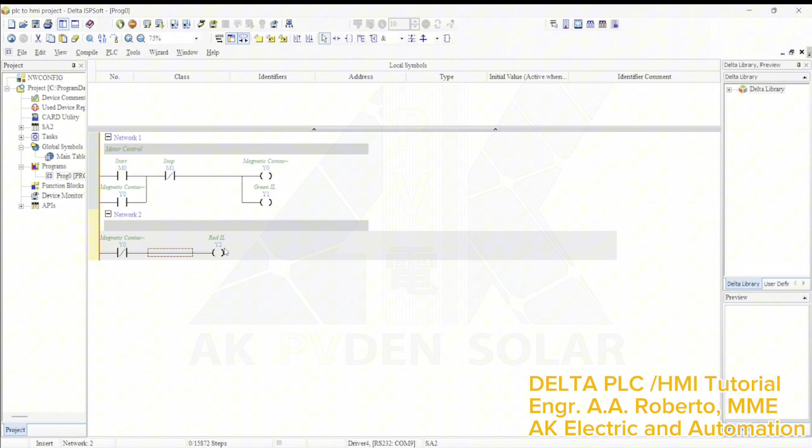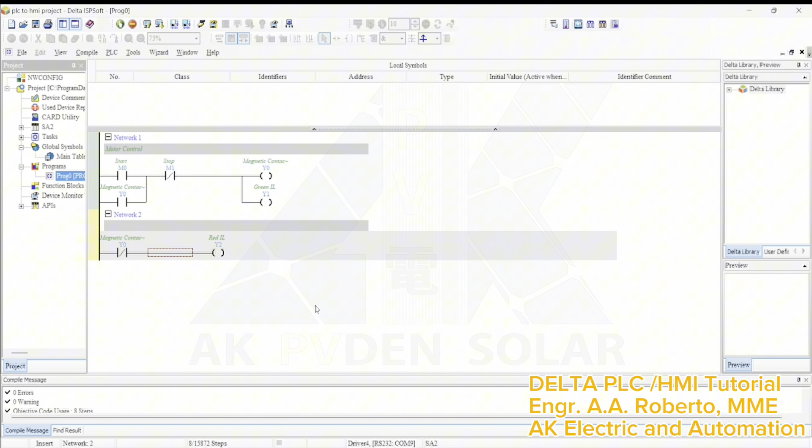So that's it. So as what we are always doing, to check our program, we need to compile it. So as what you can see, zero error, zero warning. So we are ready to download this program to PLC.

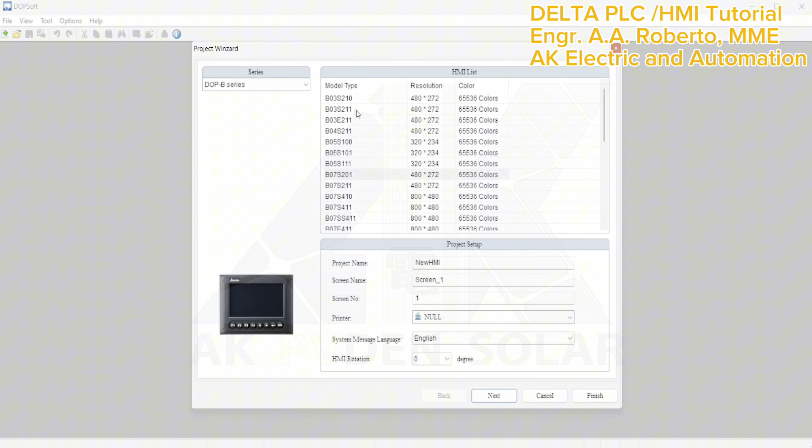DOP-B03S211. Okay? So for this project name, I'll just leave it, new HMI, or you can name whatever you want. Then just click next.

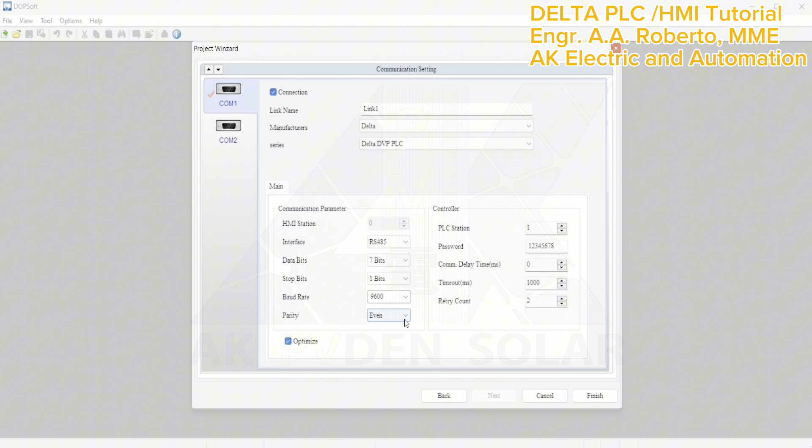And then the password is, for the default, it's 12345678. But you can change it in order to protect the program in the HMI. For this tutorial, I'll just leave it on the default setting. Okay, and then just click finish.

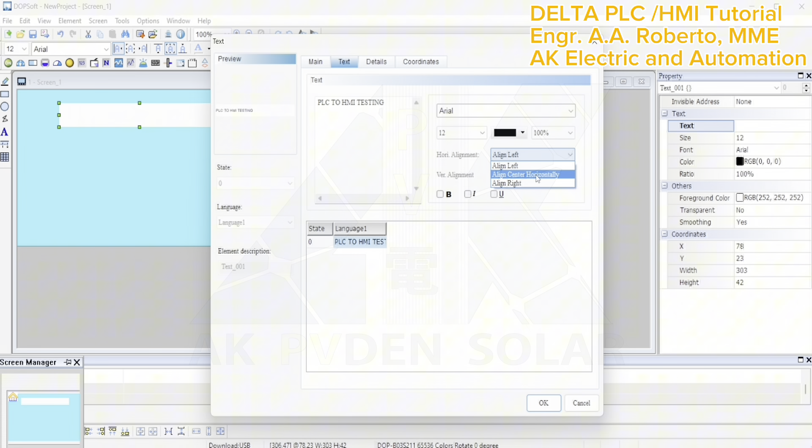Then you can choose also the font size, and then the alignment. So I will choose align center. Okay, so you will have here the preview of your text. So I'll choose the color dark blue.

And then since I want it to blend sa ating background, I will choose transparent. And I will increase the font size to 18. Okay, just click OK.

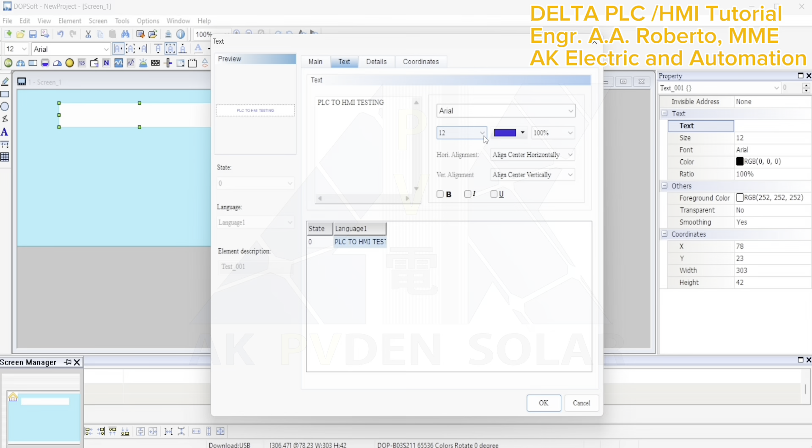So next thing na gagawin natin ay mag-a-add na tayo ng mga buttons. Okay, so to add buttons, click lang natin tong element, then go to button. So this time yung gagamitin natin is momentary na button. So draw lang tayo ng button sa screen. Okay, so double click it to edit the property.

Okay, so yung address na gagamitin natin is, as we can remember, dun sa program natin sa PLC, gumamit tayo ng memory bit. So if this button is for the start button, as we recall, yung address na ginamit doon ay M0. So yung address na ilalagay natin dito sa write address is M0, kasi yun yung susulatan niya na address. So, M0. Click lang natin, enter.

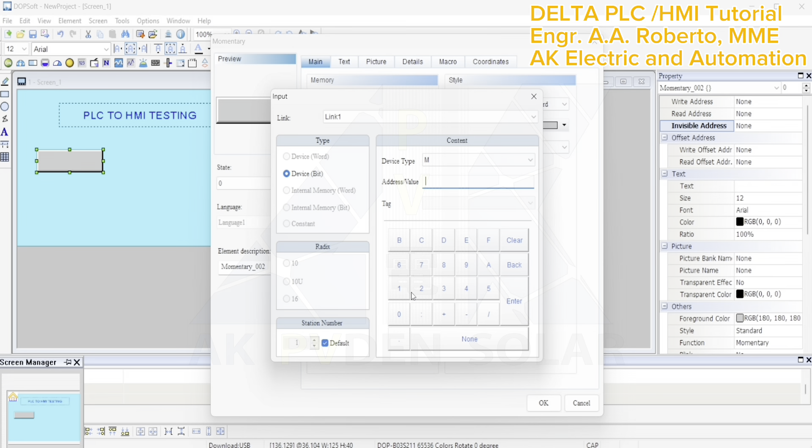And then, to edit the text, if you want to put start on this push button, just type here, start. Then, we can increase the font to 14. Then, similarly, yung kanyang state 1, ibig sabihin pag pinindot mo siya, yung lalabas is ganun pa rin. So, we can change the color into green for the start. Also, yung ating state 0 ay green din.

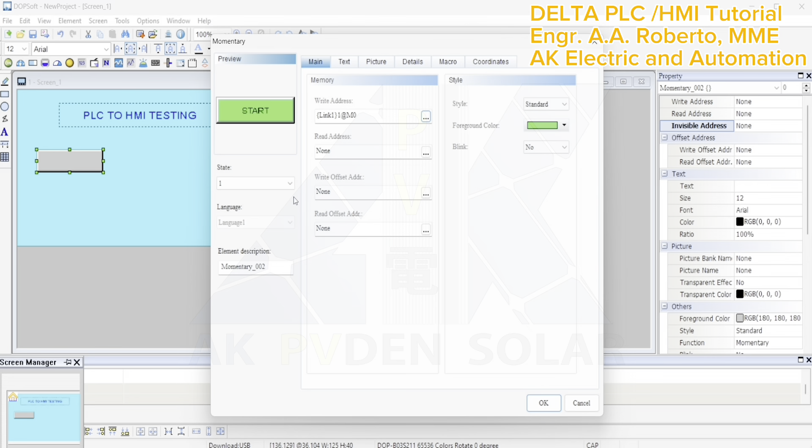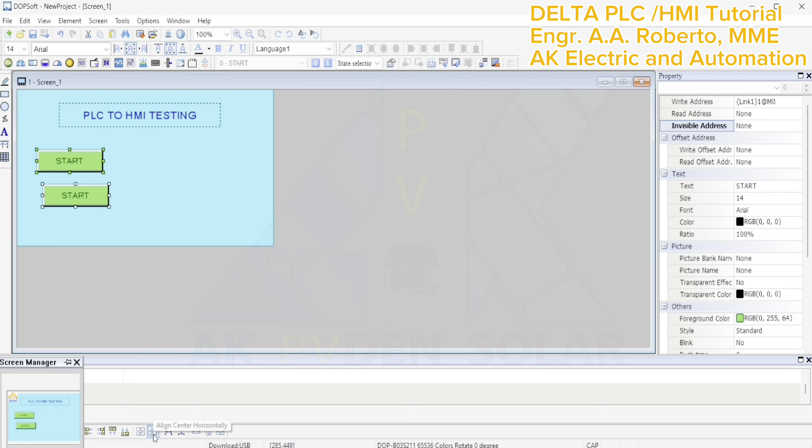Okay, next for the stop button. So, we can simply copy yung first button natin. Then, click paste. Okay, now to align this one, simply select yung dalawang buttons. And then, dito sa bottom part ng ating screen, meron tayo ditong align center horizontally. So, i-click lang po natin yan. So, automatic na po mag-align yung ating dalawang buttons.

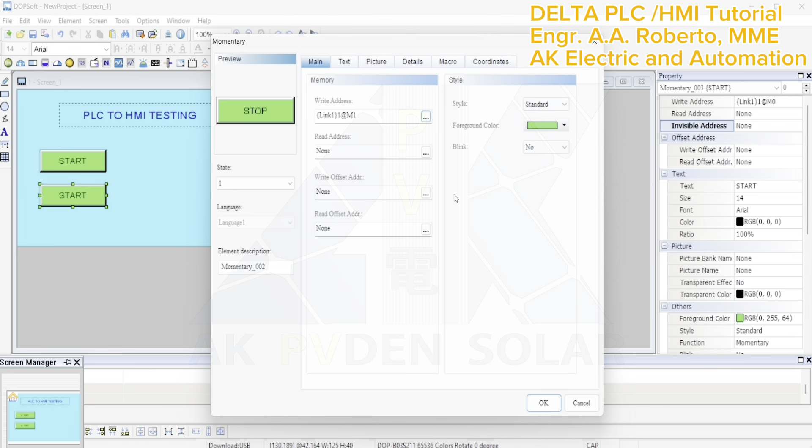Okay, so, edit na po natin yung ating second button. So, this time yung kanyang address is M1, since ito yung ating button na magkocontrol ng stop. Okay, just click enter again. And then dito sa text ay papalitan na lang natin ng stop. Ganon din sa kanyang state 1. Okay, then going back to the main, from state 0, gagawin natin red. Yung ating state 1 din ay gagawin natin red. Okay, click lang natin.

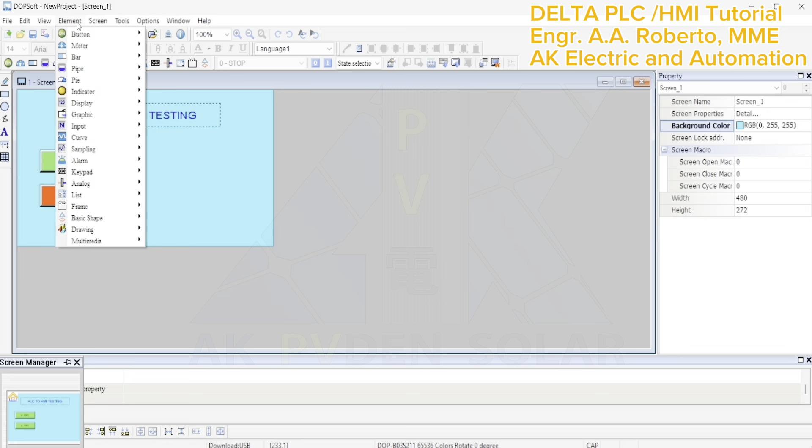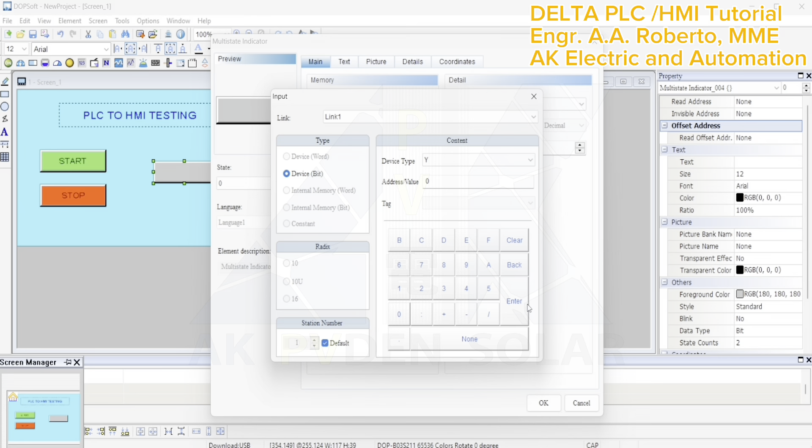So, next nating ilalagay sa ating screen is yung indicator, parang indicator lamps. So, again, to add indicators, still in the element, going to the indicator, gagawin natin is multi-state indicator. So, draw lang tayo dito ng indicator. Then, double click lang natin. Okay, so, yung address na gagamitin natin is, as we can recall, yung magnetic contactor natin is Y0. So, yung address na ilalagay natin dito is Y0. Click lang natin enter.

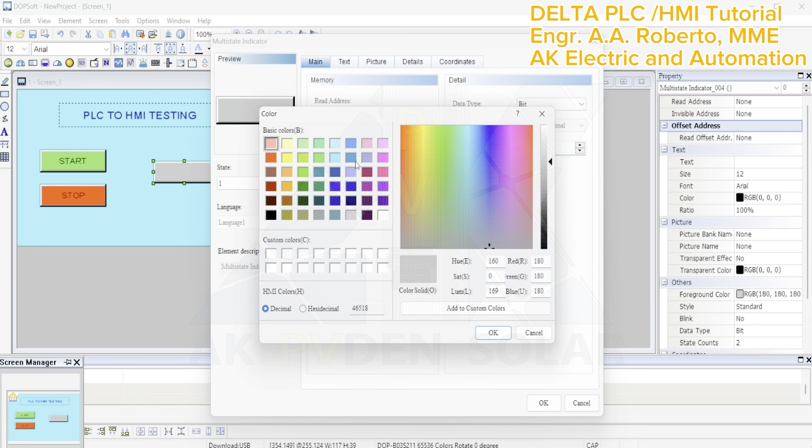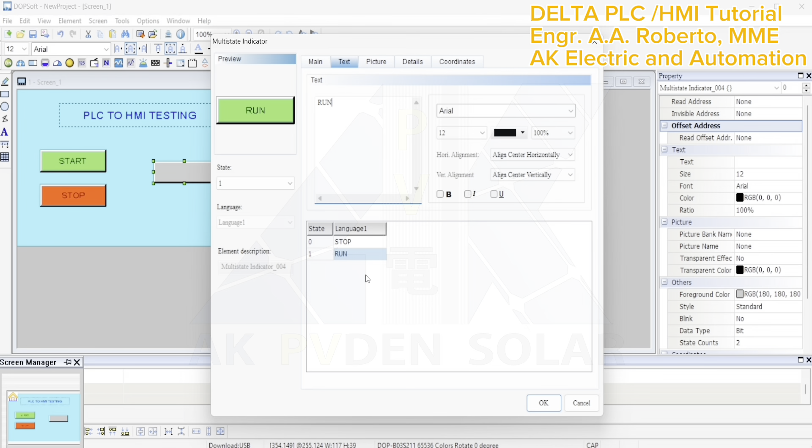Okay, so yung sa main niya is yung state 0, since ito yung stop natin. So, yung foreground color natin is gagawin nating red. Then yung state 1 natin is gagawin nating green. Okay, so for the text, yung state 0 natin, pwede nating lagyan ng stop. And then yung state 1 natin ay gagawin nating run. So parang ito yung bit nila: bit 0 is stop, bit 1 is run. Okay, so click lang natin.

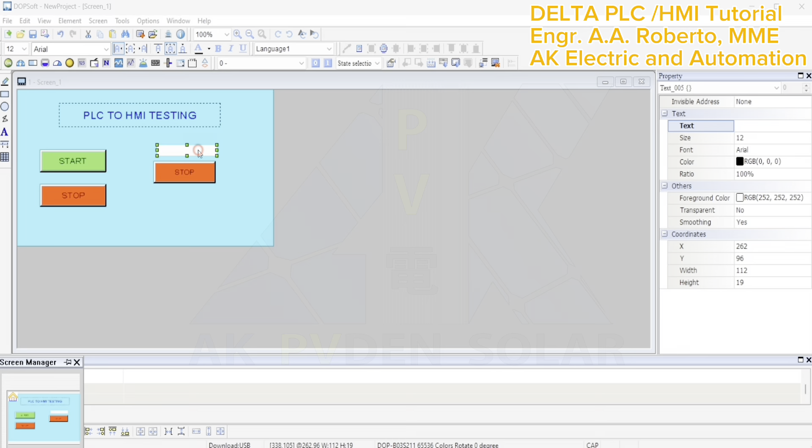Then pwede tayong maglagay ulit dito ng text sa taas niya. So to add text, go to element, and then drawing, you put text. So, pwede nating lagyan dito ng motor. Okay, align center. Then yung ating font size is 14. Then gagawin nating transparent. Gagawin natin tong color blue. Click OK.

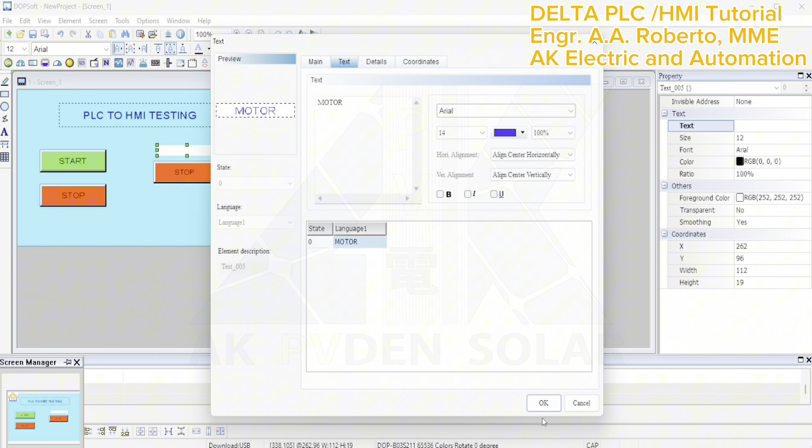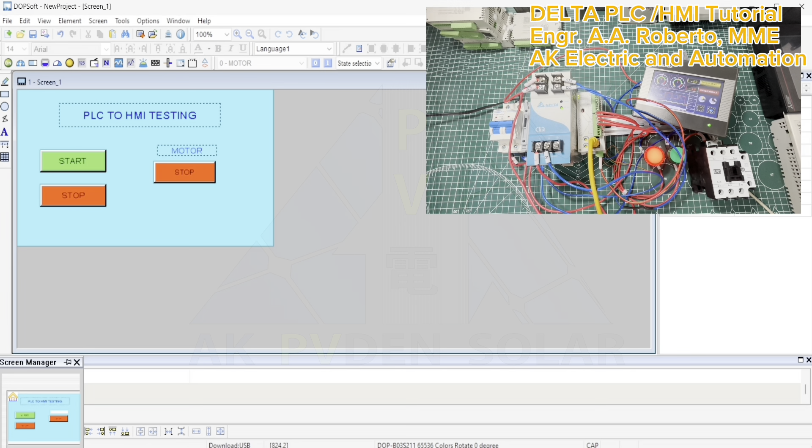So that's it. Ready na tayong i-download yung ating program sa ating HMI. So to download yung program natin sa HMI, i-click lang natin yung download screen button dito sa taas ng ating window. Alright, so downloaded na po yung ating program sa ating HMI. So ready na po nating i-test yung function or yung communication ng HMI to PLC.

So test natin yung start button. As you can see, nag-energize na po yung ating magnetic contactor. Then umilaw na rin yung ating green indicator lamp, and yung ating run indicator dito sa HMI ay nag-green na rin. And then to stop, click yung stop button. Okay, so nag-stop na po yung ating magnetic contactor. Then yung ating red indicator lamp ay umilaw na, and yung ating indicator dito na stop for our motor. So again, one more time, test natin: start, then stop, start, stop.